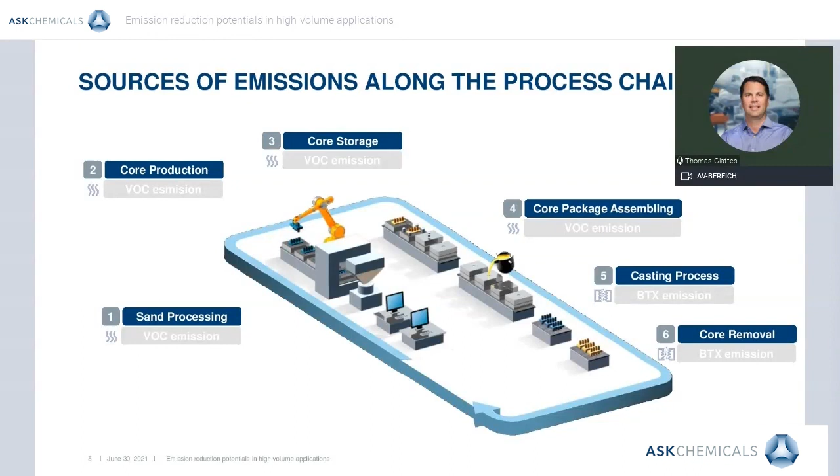We will show the impact of the different solutions on each step of the foundry value chain. On this slide, you see illustratively the different steps of the value chain. Key emissions at the process steps of sand processing, core production and storage, and core package assembling are volatile organic compounds, or VOC emissions. Key emissions at the two last casting process steps are BTX, a mixture of benzene, toluene, and the three xylene isomers.

It's an honor for me to have the privilege to present how we can reduce emissions with the Coldbox technology without changing the whole process and without big investments.

Polyurethane Coldbox resins used in foundries are the result of a polymerization reaction between the formophenolic polymer content in Part 1 and the isocyanate content in Part 2. Polyurethane is a 100% organic carbon-based plastic which releases volatile products into the atmosphere and which, during the casting process, burns and emits polluting products.

If all Coldbox are defined in this way, it is possible to limit this emission. The best system for this at present time is most certainly the EcoCure Blue family.

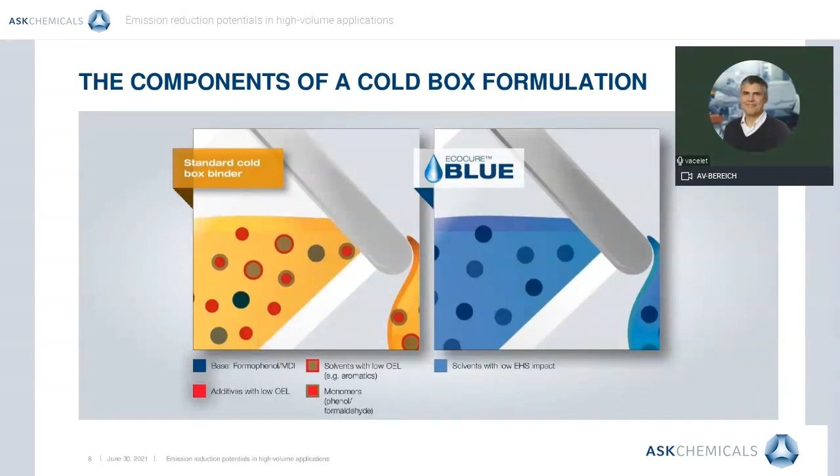If we look at the regulatory labeling of the Part 1 products on the market, we find the same hazard symbols, sometimes with the additional mention of flammability. Whereas the Part 1 of EcoCure Blue has no pictograms, and there are no hazardous products to be mentioned under MSDS.

This is due to its particular formulation, and in particular to the fact that EcoCure Blue Part 1 contains less than 1% free phenol and less than 0.1% free formaldehyde. For sure, the Part 2 still contains isocyanate, which remains to be declared and labeled.

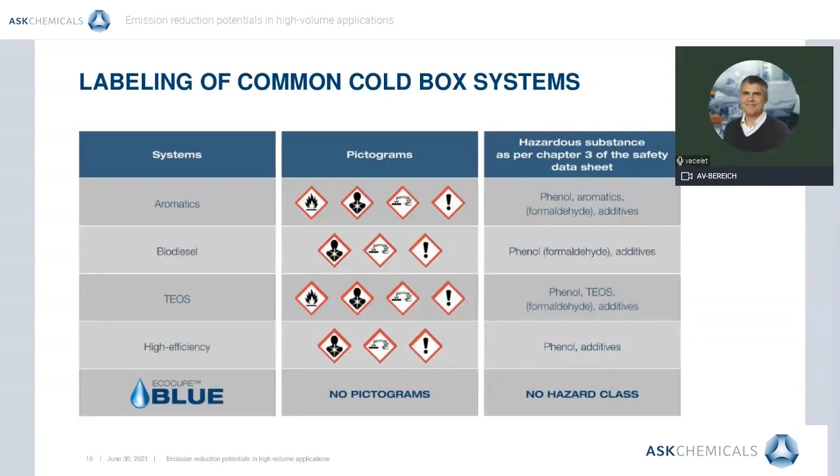In addition to the initial formula, renamed here EcoCure Blue Pure, the EcoCure Blue range is extended with a solution with less than 0.01% free formaldehyde, called EcoCure Blue Ultra, anticipating future changes in legislation, or a reformulated Part 1 to increase resistance to storage at low temperatures. That is EcoCure Blue Ice.

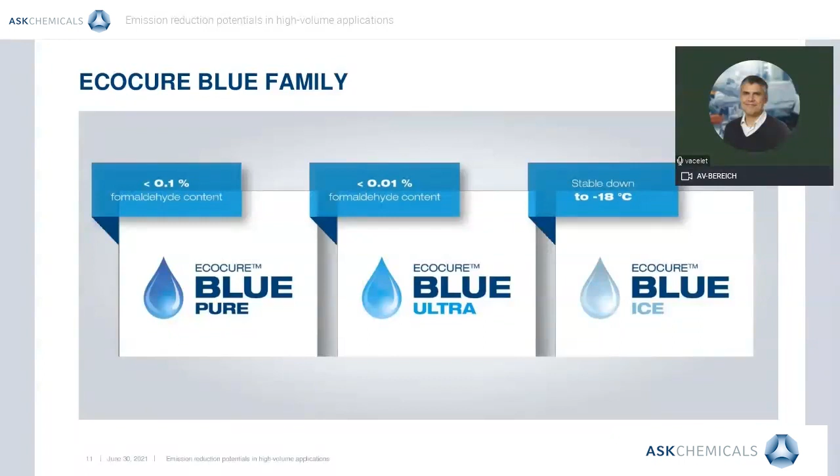This family is in constant development, with customized solutions possible, and the forthcoming arrival of a second generation of products with even better technical performance.

During the mixing, shooting, and storage of the cores, the emissions come from the evaporation of the lighter products. It can be volatile solvents, but also amine and release agents. Whereas during the casting process, the binder in the core is burned. There are evaporation phenomena, complete combustion, and forced combustion without oxygen, also called pyrolysis, where the most dangerous pollutants are produced, for example BTX and NOx.

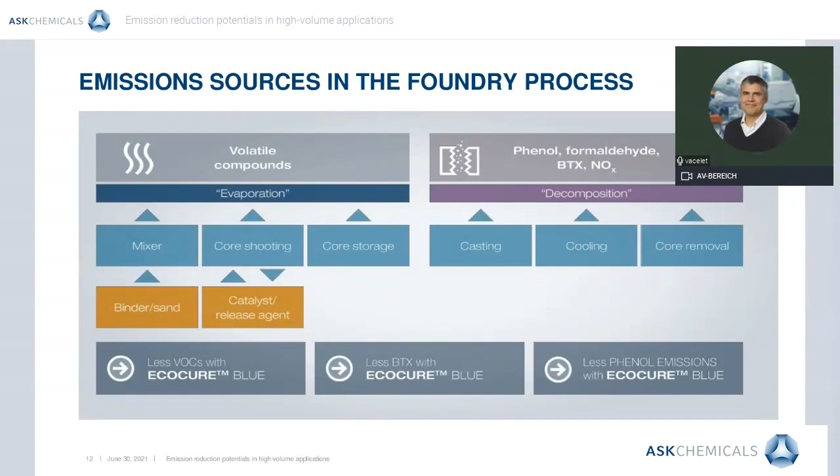So if we look now at the evaporation phenomena, there are already VOC-free formulations on the market, whereas recipes containing aromatics or TEOS generate VOCs. However, phenol, with a vapor pressure of 0.2 hectopascal at 20 degrees, is a pure VOC, and its occupational exposure limit of 2 ppm or 7.8 milligram per cubic meter demonstrates its toxicity.

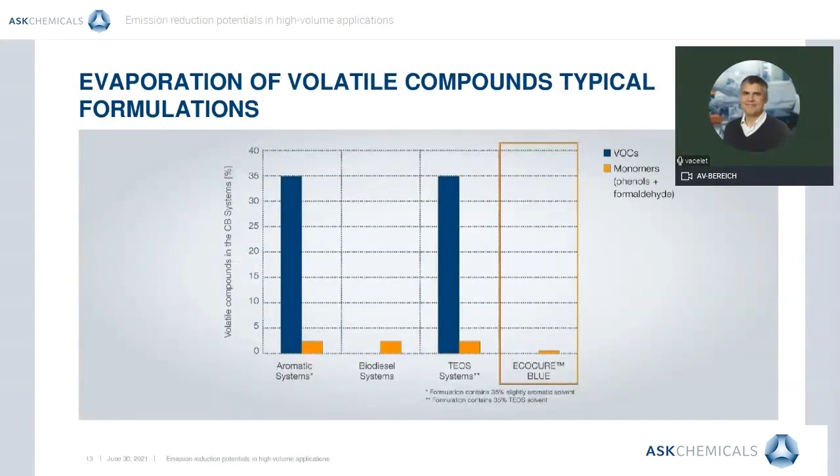Phenol penetrates the body very easily by inhalation. EcoCure Blue reduces the release of phenol by more than 80%, and thus greatly reduces the risk for workers.

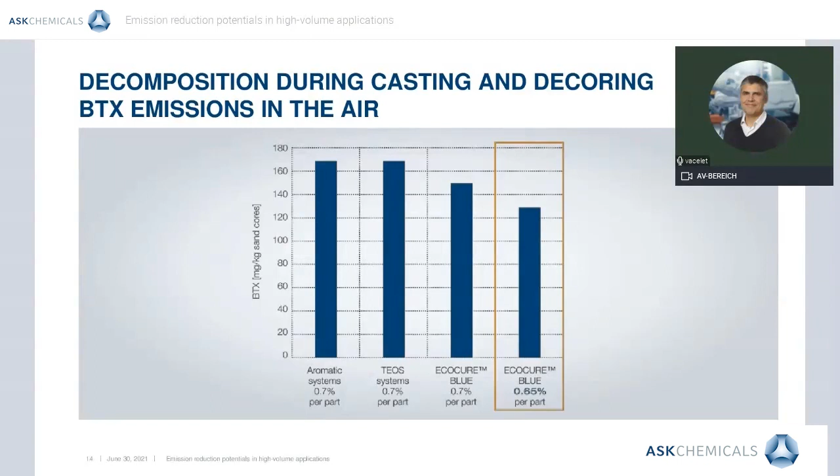We can see here that a reduction of only 7% of the binder can provoke a 13% reduction of BTX, and that is the key message. The less organic material you have in the sand at the pouring, the less BTX and other pollutants you will produce, and that is definitely the best way to reduce the emissions.

So another major advantage of the blue system is the reduction of phenol also in the pouring atmosphere. There is a direct mathematical correlation between the free phenol present in the sand at pouring and the phenol we will find then in the air.

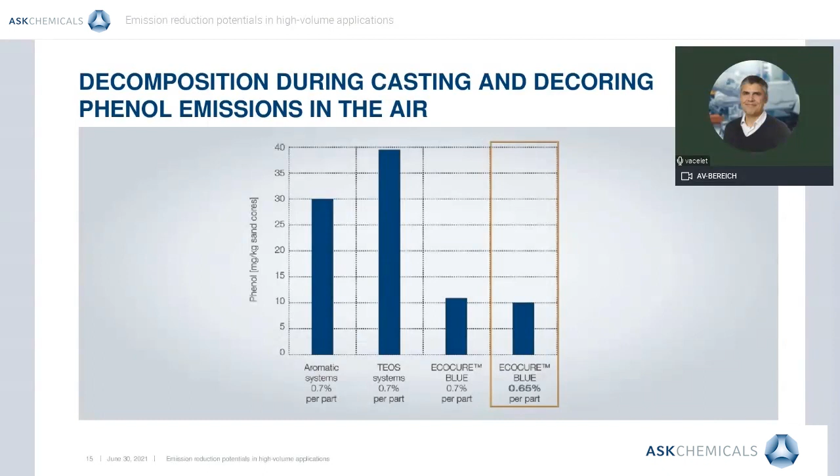The EcoCureBlue is often more expensive than most of the other systems on the market. The reason is that the production time is a little bit longer because we have to remove the free phenol in a much more drastic way.

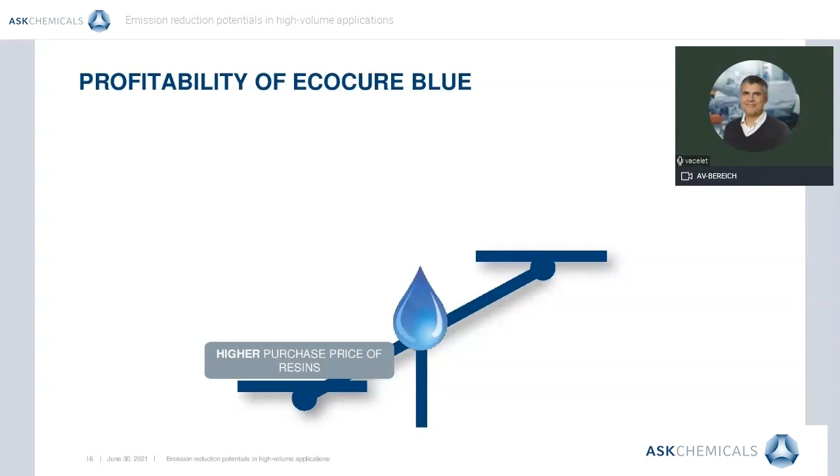Furthermore, the solvent selection is much more restrictive than for the standard products, because in order to optimize the percentage of use, we must be sure that the consistency of the quality of the binder we are delivering is perfect.

But more than the price, the cost of use should be considered. And very often, the technical advantages offered by EcoCure Blue, such as binder reduction, substitution of sand, reduction of scrap, reduction of amine, can compensate for the higher price.

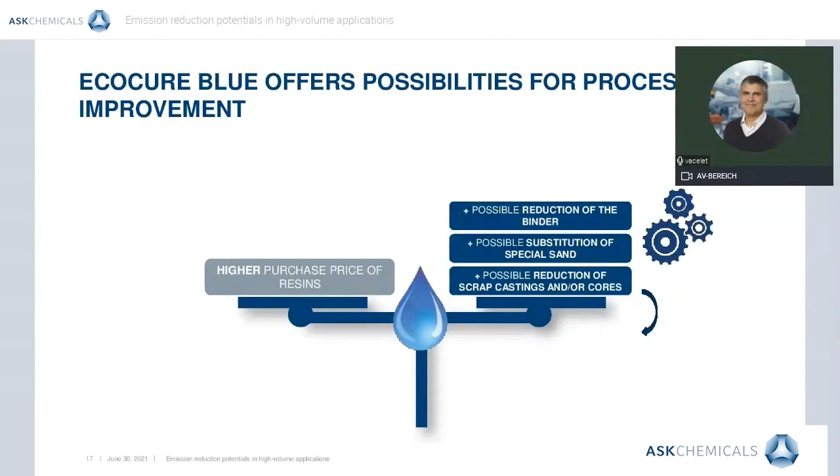And on top of that, all the EHS and environmental benefits make the total cost of ownership of this product very often much more attractive than the standard systems.

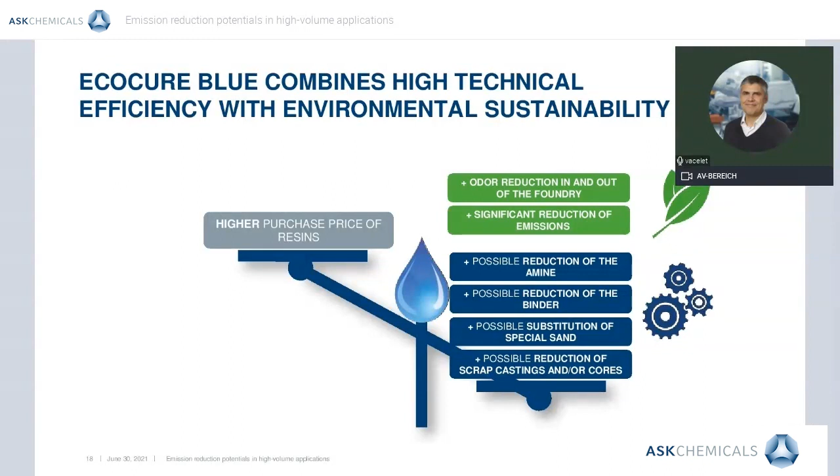For example, reducing emissions or improving the working conditions of your employees with less toxic products in the air is becoming more and more essential, even if it is not directly quantifiable financially. Another example, the reduction of the phenol content in the sand to be disposed of, on the opposite, has a direct financial impact. So those are some examples of environmental benefits.

As proof of the performance of EcoCure Blue, there is wide penetration of the European market with more than 50 customers in some 15 countries. EcoCure Blue is used in small and large foundries for small, medium, and large series in steel, gray iron, and nodular iron, as well as in aluminum.

Also, EcoCure Silver is more suitable in this case. All types of castings are produced with EcoCure Blue, from brake discs, engine parts, suspension and chassis products for cars or commercial vehicles, to castings for the mining, agriculture, rail, construction, or machinery industry.

In all of these cases, the profits were able to compensate for the slightly higher price. It has been possible to reduce the percentage of binder by an average of 10% and at the same time reduce BTX emission by about 15 to 20%.

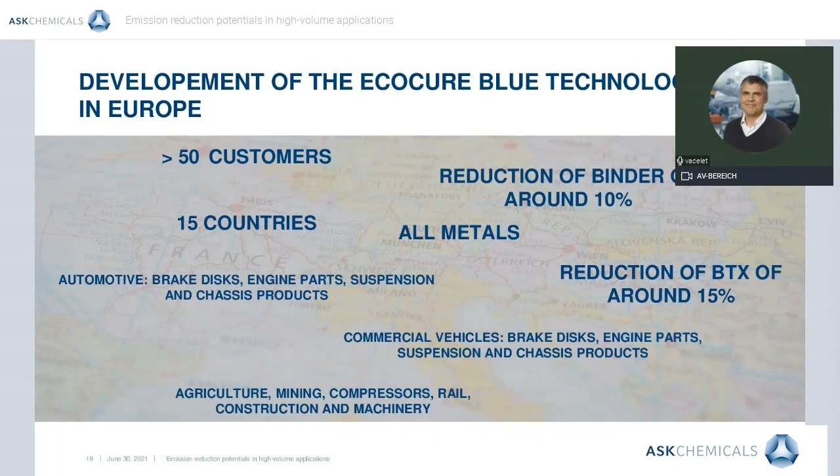One of the recent developments is the LFS technology, where different R&D teams have worked together to offer a solution to reduce formaldehyde emission from the stacks of the drying oven. By using EcoCure Blue LFS with Miratec LFS coating and Vano LFS additive, the customer has been able to reduce formaldehyde emissions from 20 milligrams per cubic meter to less than the 5 milligrams per cubic meter newly required in the revision of the TA Luft, the German law regulating atmospheric emissions.

This is a concrete example of a solution package developed by our different teams to solve new problems. And if you have specific problems complying with certain emission limits, do not hesitate to tell us about your problem. We will involve the appropriate different departments to help you as best we can.

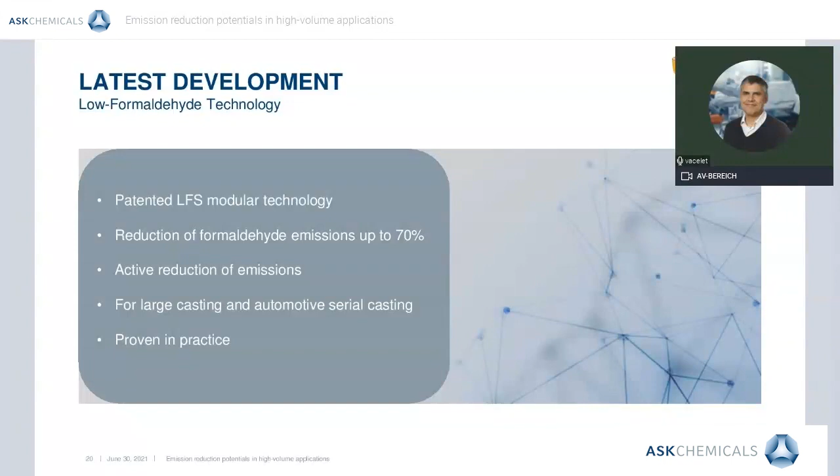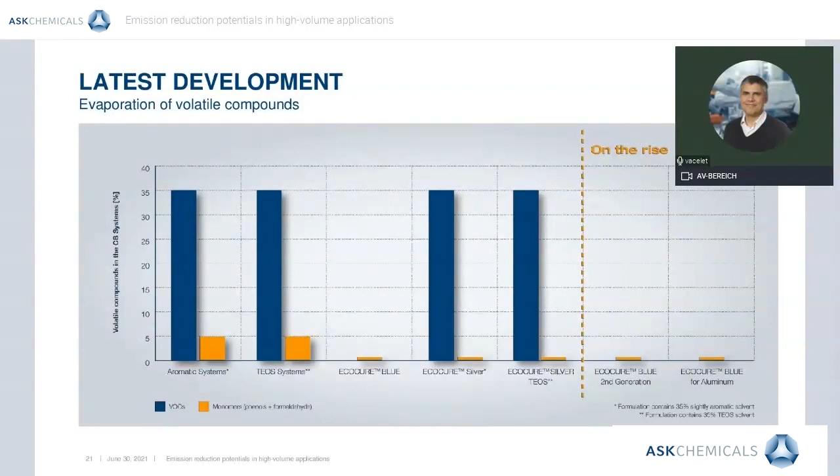EcoCure Blue is arguably the best cold box system on the market for reducing emissions, but more than a binder, it is a new platform with which our teams are continually developing new solutions. In addition to EcoCure Blue, Pure, Ultra, and Ice, we have created the EcoCure Silver using aromatic solvents.

Aromatic solvents are the best solvents for aluminum casting. They reduce the release of fumes and gases which condensate to form tars. EcoCure Silver is already in use at several aluminum foundries and even in some iron foundries.

EcoCure Silver was then developed with TEOS solvent. TEOS, or tetraethyl orthosilicate, is an alternative to aromatic solvents. Both are VOCs, so highly volatile, and can enable a reduction in tars. TEOS volatilizes even faster than the aromatics and is less odorous when cold, and therefore is sometimes interesting. Nevertheless, TEOS is a less good solvent than aromatics.

The properties are generally slightly lower, and the exposure limit for workers is about 10 times lower than for aromatics. So that is not a universal solution.

We are also in the final stages of developing a second generation of EcoCure Blue, which will be even more efficient than the first and should be on the market before the end of the year.

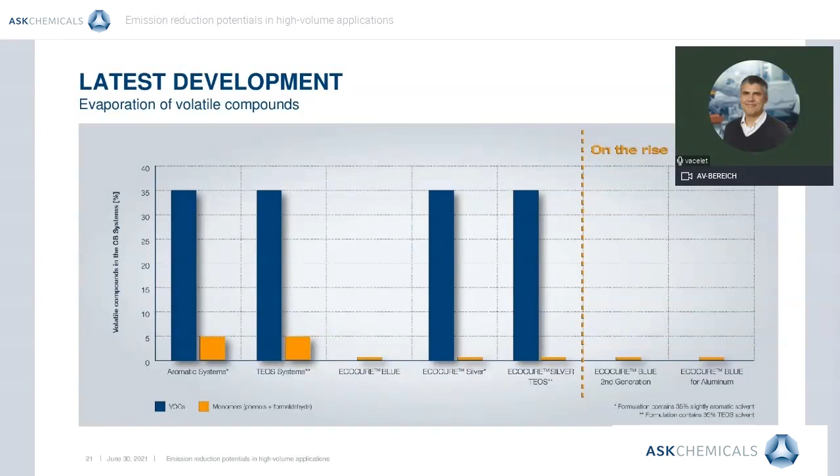If we look now at how the solutions for BTX behave, silver and TEOS are slightly better than the standard system as they benefit from the EcoCure Blue technology for their base. The new generation of blue will benefit from new solvents, specially selected by our R&D teams to generate the least amount of BTX.

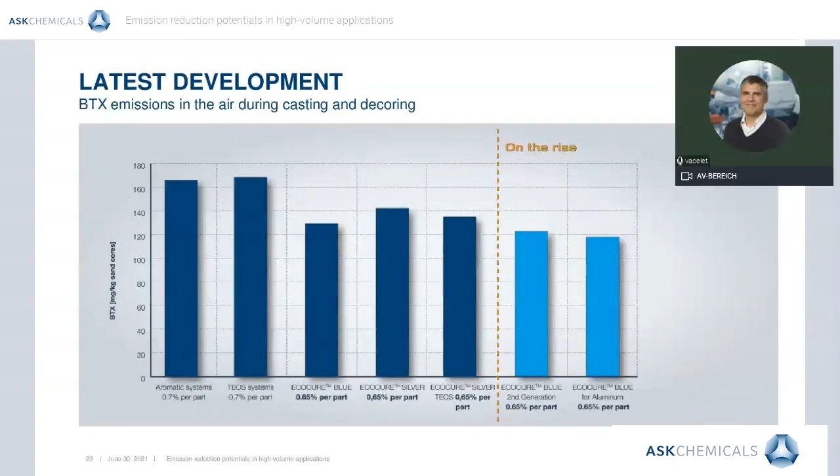While the new aluminum solution is, according to a first promising test, the system that will generate the least BTX. And all these systems also benefit from the performance of the EcoCure Blue technology, and in many cases, the binder content can be lower, which, as explained before, is the best way to further reduce emissions.

So the EcoCure Blue second generation will be even more reactive and efficient, allowing for further binder reduction and therefore a further reduction of emission and a further improvement of the total cost of ownership.

The new aluminum solution will not only be VOC-free, but will also reduce gas pressure and be characterized by low thermal distortions. Okay, it was a brief overview on the promising solutions that will come to market this year and which we will present to you in a much more comprehensive way in a few weeks or months.

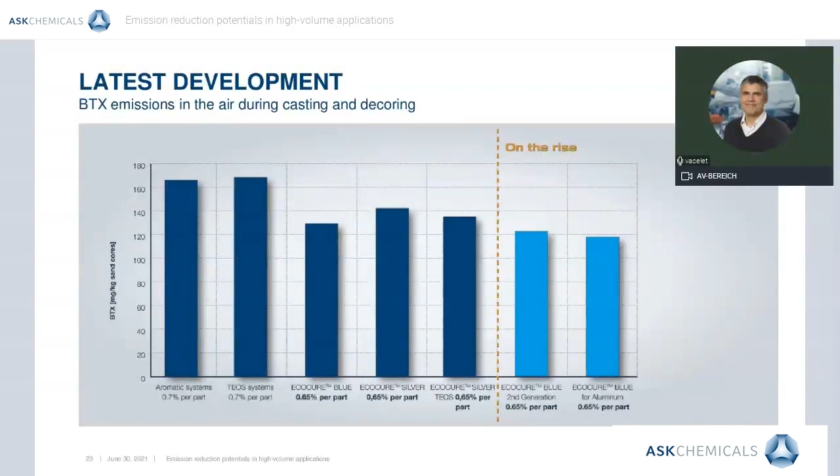To summarize, the Blue family is certainly the best solution in the market to reduce emissions without significant investment. We can reduce emissions and protect the health of workers at many steps of the process by reducing evaporating emissions in the core shop, but also at the point of pouring. Nevertheless, as long as we decompose an organic polymer at such high pouring temperatures, we will produce pollutants.

With the Blue system, we can reduce emissions up to 90% in the core shop, while at pouring we are more limited and can reach 25 to 30% reduction in the best cases.

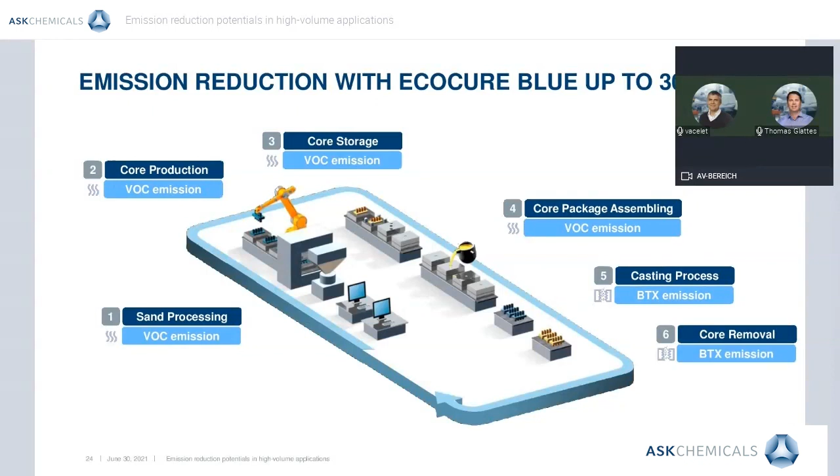Thank you, Thomas. We will dedicate the last part of the webinar to ASK's inorganic binder system called Inotec. The binder system is applicable in hotbox core production processes and has set an industry standard as the emission-free alternative binder system in comparison to conventional organic binder systems, especially in the light metal automotive industry and low-pressure die casting and gravity die casting applications.

The Inotec technology is described as a two-component binder system. Component 1 forms the liquid Inotec binder, which can be described as a modified solution of alkali silicates. The binder has a strong influence on specific properties of the molding mixture, for example flowability, and the sand core itself. Characteristic strength profiles with adjustable humidity resistance properties result in dependency of the type of product used.

Component 2 is the powdered Inotec promoter, which is a mixture of synthetic and natural raw materials based on a completely inorganic product composition. Through the use of the Inotec promoter, primarily mechanical and thermophysical parameters during the core production process, but in particular during the casting process, can be adjusted to assure castings of high dimensional accuracy and high surface quality. The main function of this component is to increase immediate core strength for fast ejection in the core production process.

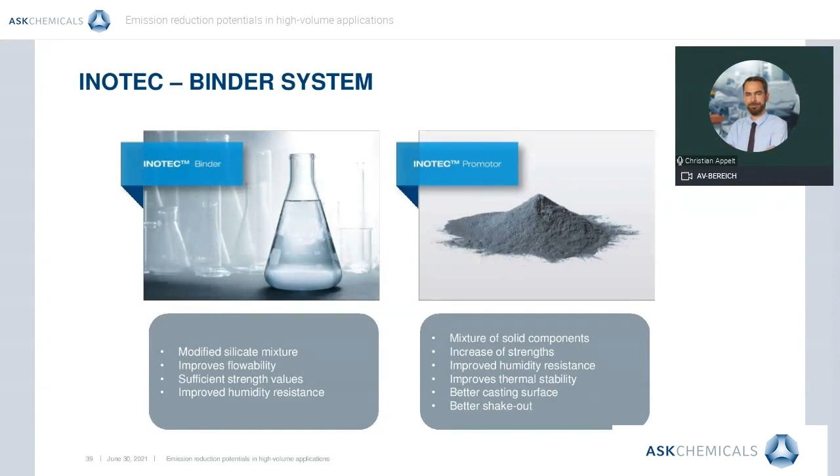A typical molding mixture based on silica new sand is composed of approximately 2% of the liquid Inotec binder and 1.0 to 1.9% of the solid Inotec promoter. The higher the addition rate of the promoter, the higher the performance level of the product.

The resulting molding mixture is fluidized by compressed air and transported to the cavity of the core box via a cooled shooting plate with integrated shooting nozzles. High diameters of the shooting nozzles and temperature control of the shooting plate are fundamental to assure high productivity in the production and sand cores of high quality. The shooting plate shuttles aside and is simultaneously substituted by the gassing plate.

The core production is characterized by a physical chemical curing mechanism. The introduction and supply of thermal energy from heated steel tools and dehumidified heated compressed air leads to the evaporation of the free solvent water and simultaneously initiates a chemical polycondensation reaction with the formation of a three-dimensional silicate network that describes the actual strength composite of the sand core.

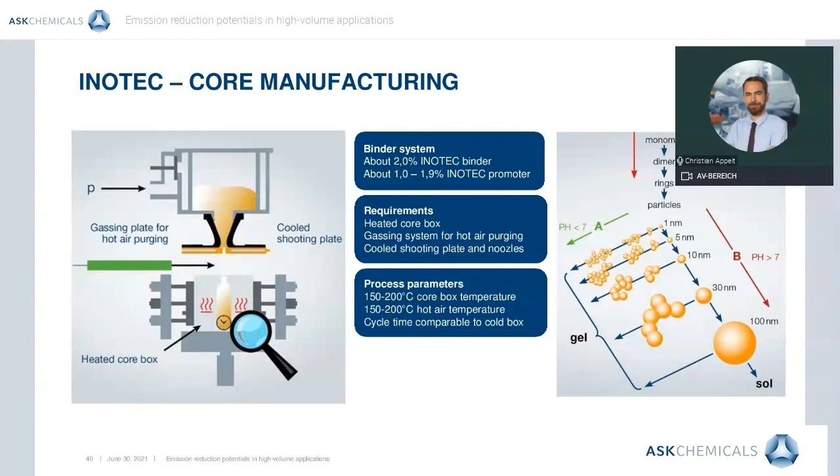The 100% emission-free footprint of the Inotec technology can vividly be demonstrated best by comparing the formation of fumes and smoke as a result of the thermal pyrolysis of the binder system upon casting or at the raw part in the process of permanent die-mold ejection.

A gas chromatographic analysis of the emission stream shows that 98% of the emissions can be reduced. The main improvement here results from the absence of medium volatile compounds, which are responsible for BTX emissions in the casting process using polyurethane standard cold box binders.

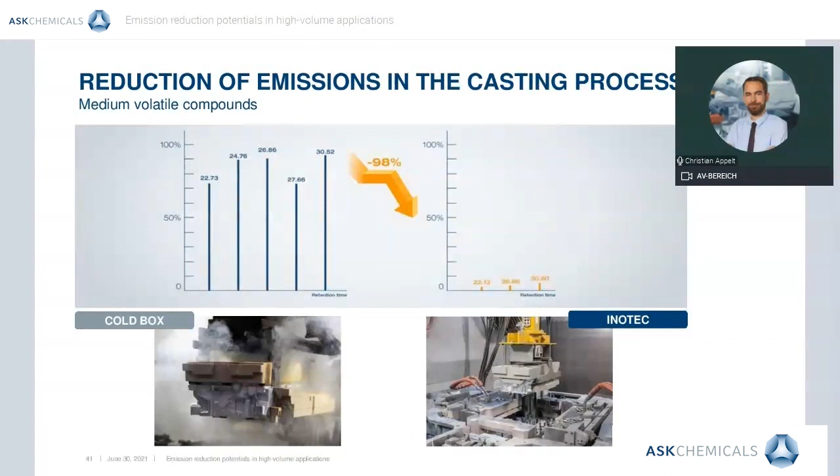Besides the ecological benefit of missing emissions in the casting process with Inotec, savings in cleaning maintenance for the permanent die mold are a result as well. When casting with organic sand cores, the buildup of condensates occurs at the permanent die mold, which must be removed by employees in regular intervals to ensure correct functionality, especially of movable parts.

The physical strain for employees involved in this work is high. In addition, there is a very high level of noise pollution. When casting with inorganic sand cores, this costly and energy-intensive cleaning step is reduced by more than 50%.

As a side effect, permanent die mold casting processes with inorganic bound sand cores are operated at lower temperatures compared to casting processes with organic bound sand cores, leading to a higher die mold availability of 25%. Furthermore, the time-consuming cleaning of the air systems is no longer necessary. The use of hazardous substances in the exhaust air purification system is also no longer necessary.

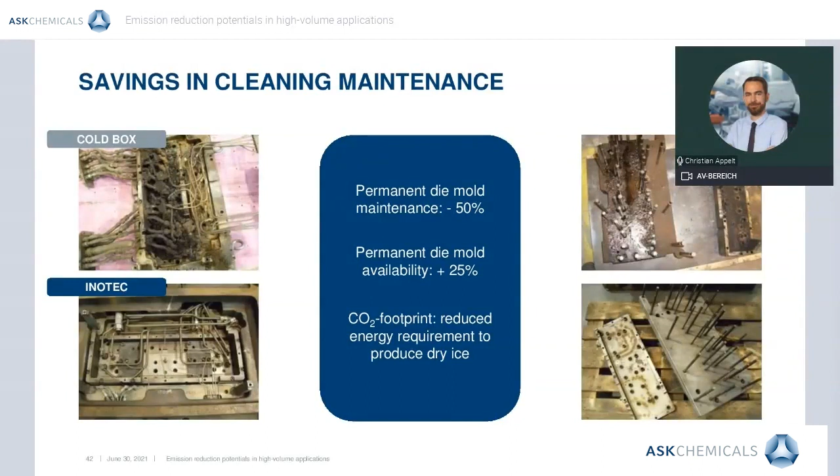ASK Chemicals commissioned TÜV Rheinland to create a comparative environmental life cycle assessment of a standard cold box binder system with Inotec, in order to clarify which product is more environmentally friendly through the respective life cycle. Overall, the inorganic binder system Inotec fares better, leading to the conclusion that Inotec is an eco-friendly product and is more environmentally friendly than the compared cold box system.

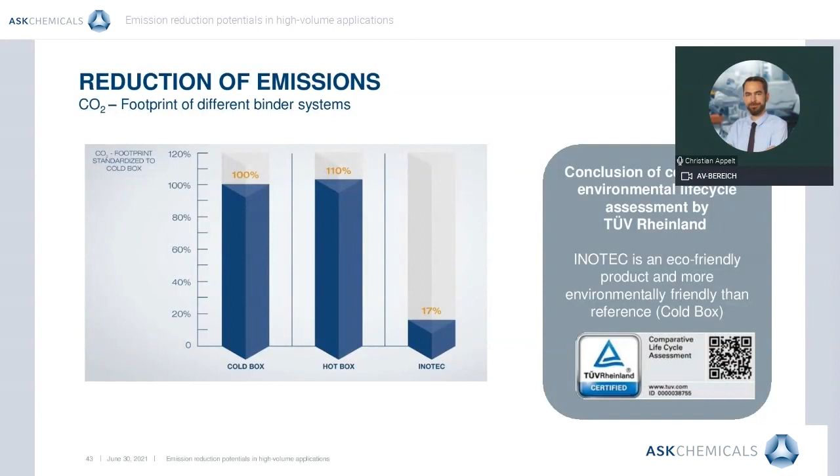Besides the ecological benefit of reduced emissions in the casting process with Inotec, an increase in productivity is apparent as well. The lack of condensate buildup in the permanent die mold for Inotec-based casting processes enables lower die mold temperatures, thus faster solidification, in addition to higher permanent die mold availability because of savings in cleaning and maintenance. These effects overall contribute to a productivity increase of roughly 30% in the casting process at the die itself.

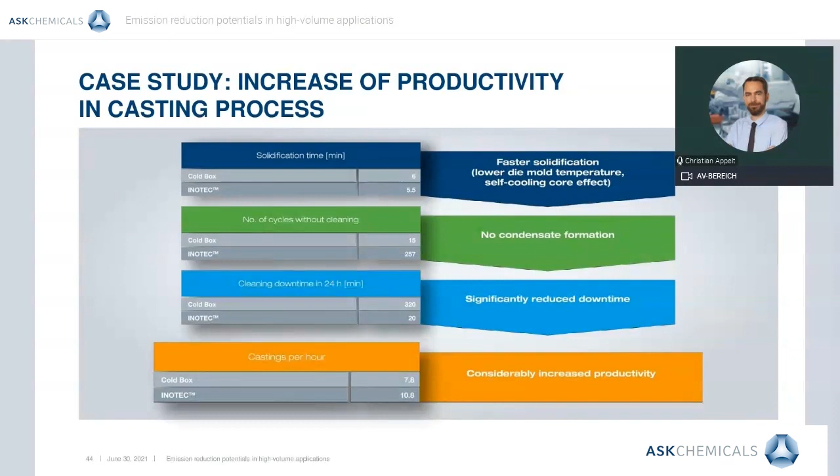An additional advantage of the inorganic binder technology Inotec is embedded in its technological influence on the metallurgic structure of the cast aluminum parts. The metallurgic property of secondary dendritic arm spacing is mainly influenced by solidification. Thus, faster solidification leads to lower SDAS values and castings with higher mechanical strength. Lower permanent die mold temperatures in the case of Inotec already provide faster solidification, but the residual water of the inorganic binder bridge further withdraws energy from the liquid aluminum melt for evaporation, leading to an add-on effect on solidification.

Inorganic sand cores exhibit roughly 25% of the gas potential of organic bound sand cores. Thus, the pore percentage in the casting and degree of porosity is dramatically decreased. Both parameters contribute to improved dynamic properties of the casting, as metallurgical structures of higher strength and elongation properties result. This effect enables wall thickness reduction and contributes to the overall trend of downsizing and lightweight construction, especially in ICE powertrain applications.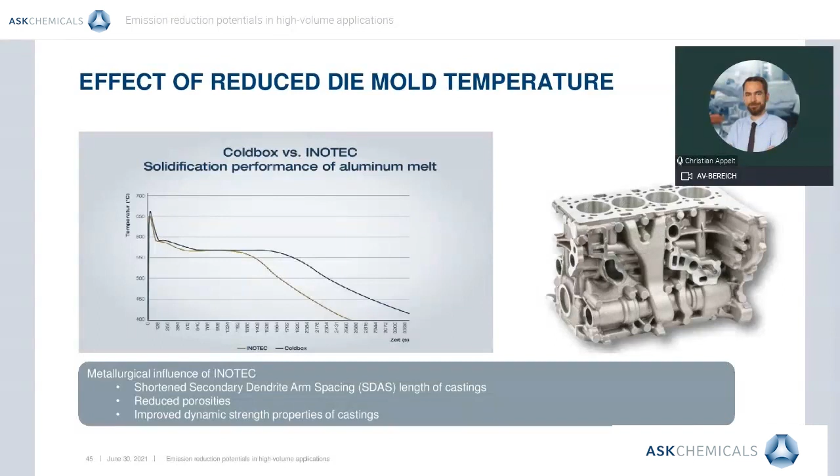Traditionally, the inorganic binder system Inotec has been utilized in low-pressure die casting and gravity die casting processes to produce classic ICE powertrain components, for example 4- and 6-cylinder heads and the corresponding crankcases. Nowadays, Inotec has matured to a much more versatile binder system, which is applied to a wide range of aluminum passenger car components, for example e-engine housings, suspension parts, and body structures.

The difference to state-of-the-art ICE powertrain applications is characterized by a different number of cores per core package and varying core weights. While ICE powertrain components are based on core packages with different cores of high diversity concerning mass and geometry, suspension parts and body structures casting processes are based on just 1 or 2 cores with greater mass.

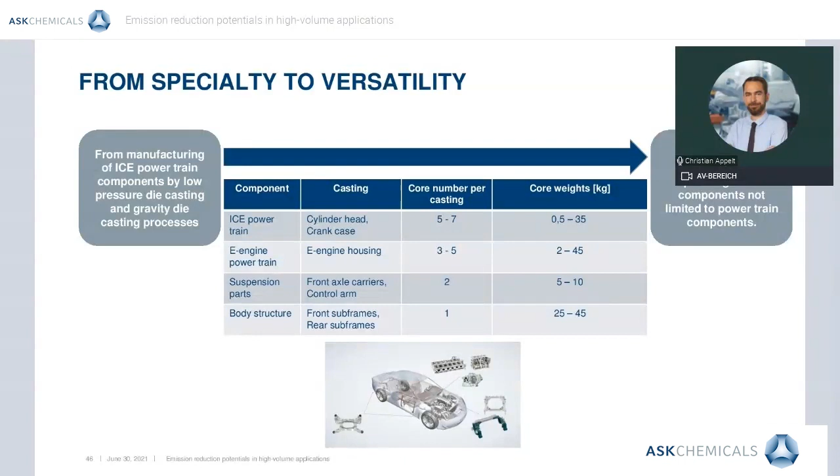The versatility of the Inotec technology is achieved by segmenting the necessary product performance requirements of the binder system according to the castings produced, and by considering the total cost of ownership approach that captures the full cost structure of a casting process until selling the part to the respective customer. The determining key performance indicator here is the so-called sand-aluminum ratio, that compares the weight of the sand core package with the weight of the casting.

The higher the KPI, the higher the sand core weight and the lower the casting weight. ICE components, for example cylinder heads and crankcases, show a very balanced sand-aluminum ratio, while the ratio value is already increased for e-engine housings. Both casting types need in general binder systems that ensure high dimensional accuracy, as well as sand cores with low gas potential and very good shakeout performance of the cores, as both components use filigree water jacket geometries.

In comparison, suspension part castings are produced using voluminous sand cores. Thus, the sand-aluminum ratio is higher, and the main product focus changes to cycle time, strength, and core distortion, all parameters of the core production process itself. The following 2 slides will be used to demonstrate the effectiveness of this approach.

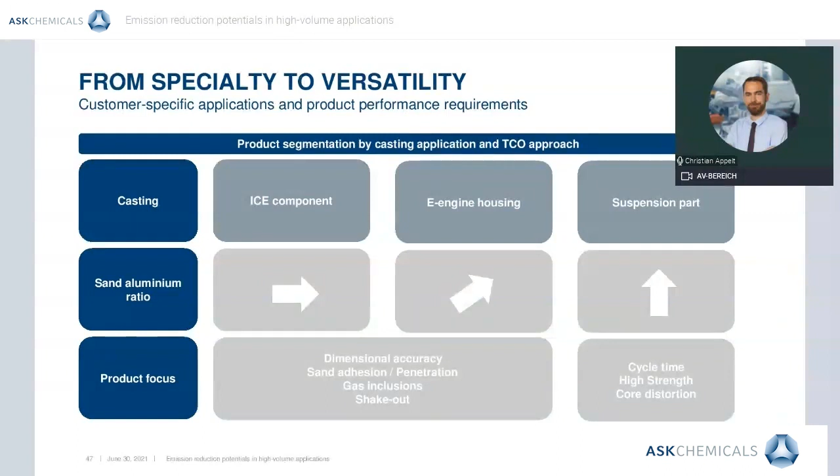A predominant problem in the production of cylinder head castings using inorganic binder systems is the appearance of sand adhesions and penetrations after raw part machining, especially on the core print areas of port cores. This defect is described by the partial appearance of sand grains on the casting surface, due to the mechanical penetration of the liquid aluminum melt into the sand core surface, or the electrostatic adhesion of sand grains on the casting surface itself. Casting parameters, for example casting temperature and pressure, have an influence, but customers are seeking a chemical binder system solution that withdraws the need for intensive process control and casting rework by shot blasting.

In this case, ASK is able to fine-tune the performance properties of the Inotec promoter to the local sand quality used. As the components of both silica sand and the promoter are of inorganic nature, an interaction is commonly observable and changes the properties of the sand core, for example thermal stability. Thermal stability is described as the resistance of a sand core towards thermal and mechanical strain of the casting process, and is an intrinsic property of the binder system itself, characterized by the so-called softening temperature.

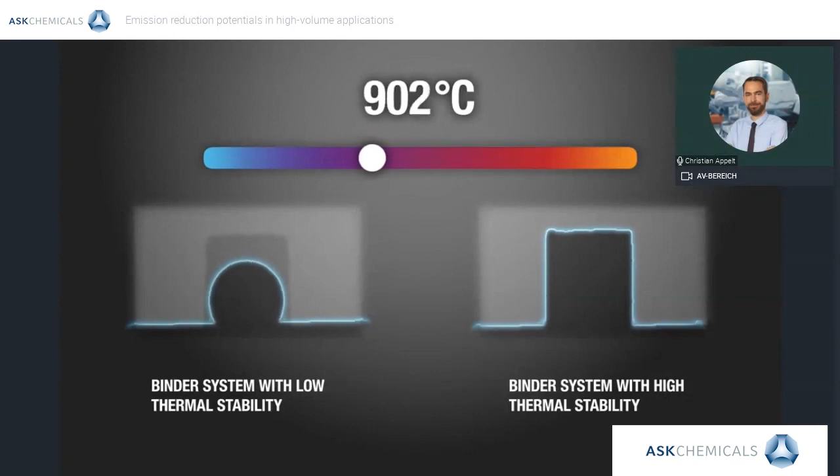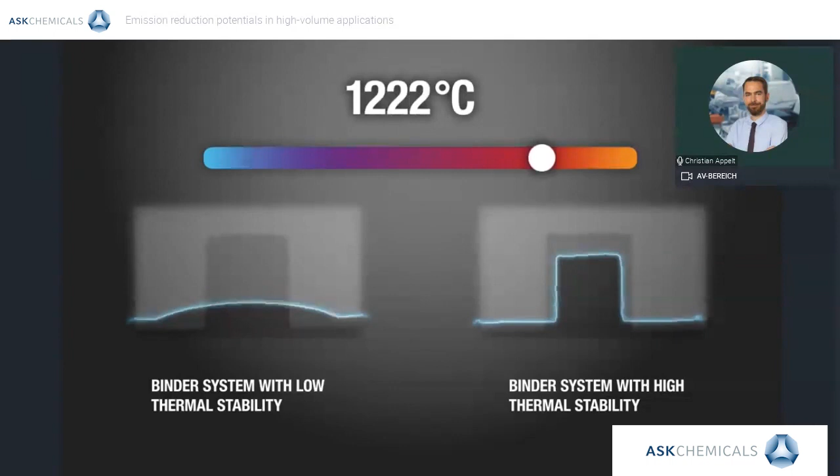The softening temperature of a binder system can be monitored using heating microscope technology. The specimen on the left shows low thermal stability and softens at temperatures below 730 degrees Celsius. The sample on the right exhibits high thermal stability and remains stable over a wide temperature range, softening only outside the temperature range of aluminum casting applications.

The result of customizing the thermal stability of the binder system to the impurities of the local sand quality is that the defect of penetrations disappears, removing the need for cost-intensive shot blasting.

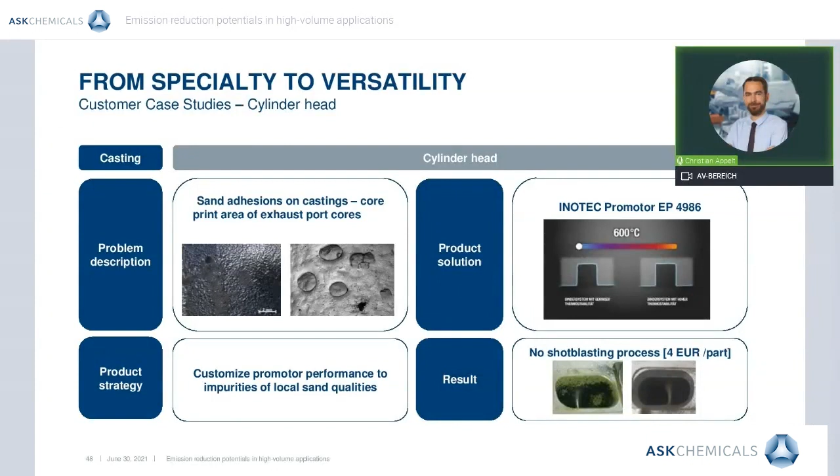The second example arises from the field of suspension part casting. The customer reported a limitation in productivity due to long cycle times and reduced tool availability in the core shop. The current addition rate of the inorganic binder system was in principle too high, but necessary to handle the voluminous cores because of strength requirements.

The buildup of binder system residues on the core box surface and the core itself resulted in excessive use of release agent and tool maintenance work in short intervals.

The solution here is to customize the binder system to the process by providing a binder system with an adjusted strength profile. Inorganic binder systems for suspension part cores need an adjusted strength profile compared to cores for cylinder head or crankcases. Higher immediate strength is necessary, while lower final strength is acceptable.

As a result, the components of the binder systems could be reduced, enabling a cycle time reduction of 10%.

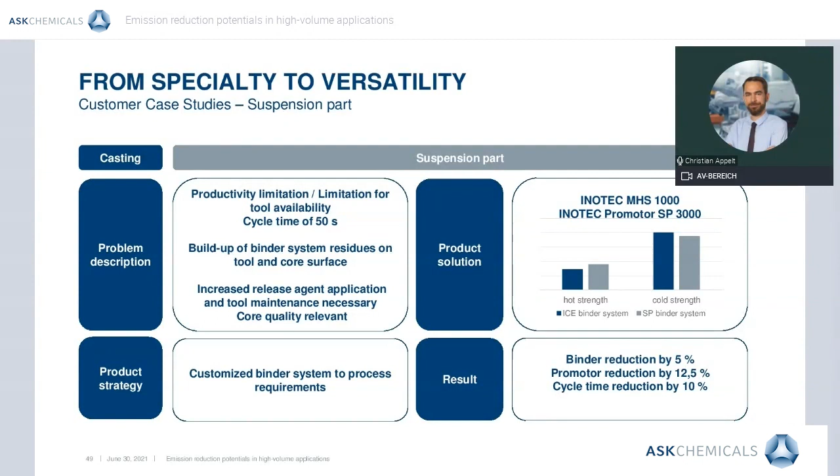In summary, the Inotec Trinity concludes the ecological, economic, and technological benefits of the binder system. Inotec is the emission-free alternative to conventional organic binder systems, more sustainable and more environmentally friendly. The initial higher investment for the equipment of core manufacturing is compensated along the process chain by savings in maintenance, the lack of air treatment systems, and higher productivity at the die itself. Technological benefits rely on improved dynamic properties of the casting, enabling downsizing and lightweight construction.

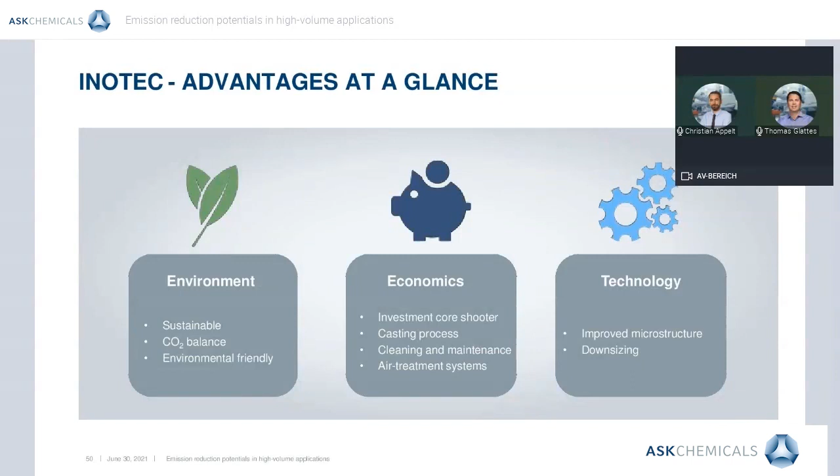Inotec is able to reduce VOC emissions as well as BTX emissions by up to 98% along the complete casting process chain, and is the industry standard for emission-free applications.

With this said, I would like to hand over the presentation to my dear colleague to conclude the main messages of the webinar.

Christian, before I do that, there's a couple of questions for you. Yeah, sure. One question is, what is the current status of inorganic binder systems in iron and steel casting applications?

Well, serial applications for Inotec in iron and steel castings in Europe are still missing. We have understood that casting temperatures of 1100 degrees or even higher remain a challenge for inorganic binder systems, as these materials act as a flux for silica sand.

ASK has developed water-based coatings for Inotec-bound cores that overcome the sensitivity of inorganic cores towards humidity without core breakage. ASK is currently working with different industry partners with the intention to sharpen the requirement profile for the development.

One concept includes, for example, the combination of Inotec forms, outer forms in the package, and inner cold box cores in sand package procedures, in order to reduce emissions while lowering the technological requirement profile for the Inotec forms at the same time. Other applications, like iron brake disc production, rely on the use of 100% Inotec cores that are coated.

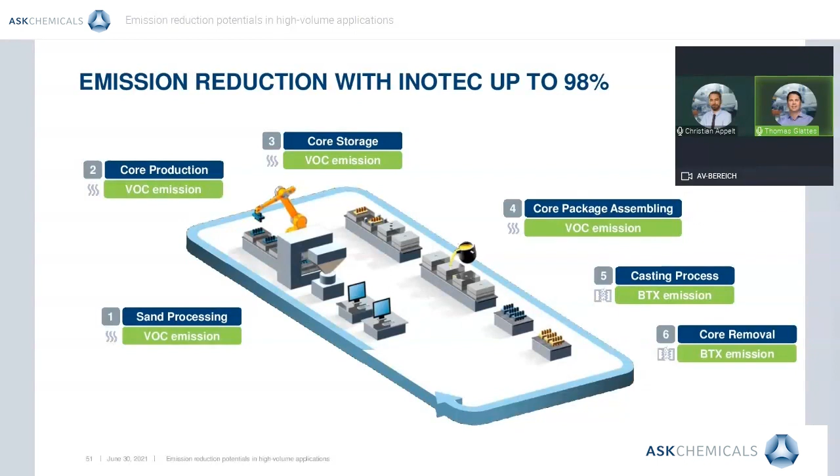Okay, we are at the end of today's webinar. We hope we provided you a good overview about the sources of emission along the process chain and the different potential solution approaches from ASK on how to efficiently reduce key emissions.